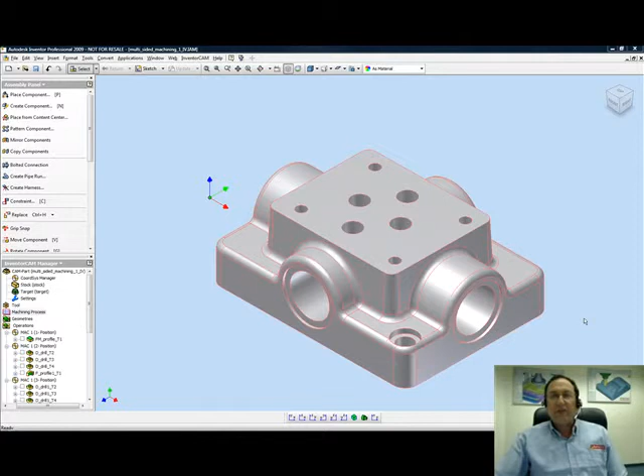I'm Sydney, your InventorCAM Professor, and in this session we'll show you how to machine this part using multi-sided machining.

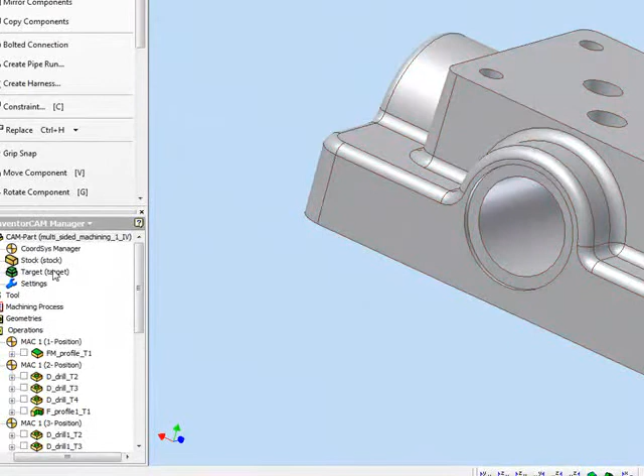If we take a look at this part, you'll see we have to machine it from the top, and we also have to drill out and machine this area over here, and the same thing on this side, and on this side as well. We should also note that the stock material is actually a cast part.

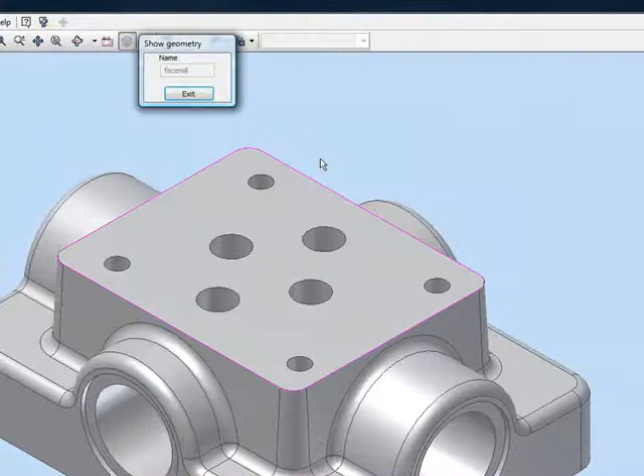I'll start my first operation by simply face milling the top. In my face mill operation, my geometry is just the boundary over here. The tool is a 16mm end mill, my upper level is 2 millimeters above the zero of the part, and my face depth is on the face itself. The technology used is hatch technology, going back and forth on the part.

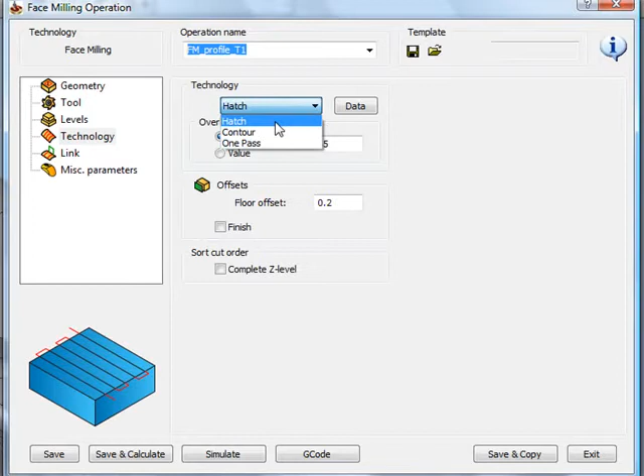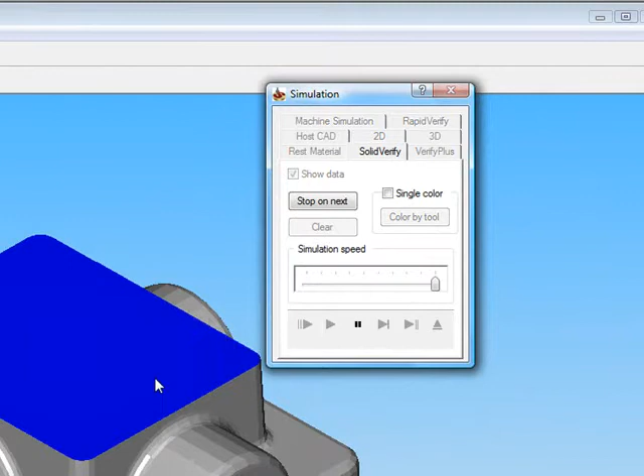Looking at our simulation, you'll note that it only works on this particular face. If I do a solid verify simulation, you'll see the tool goes down and mills every one of these faces back and forth, only on this face and nothing else. My stock material is a cast part, so only this top part needed to be machined.

In my next operation, I have to drill out one of the sides. I'm using my next home position, position 2, to drill out this side and mill this face. I've created, using MAC 1, a drilling operation as shown here, using that point over there. The tool is an 8mm tool at 90 degrees as a center drill.

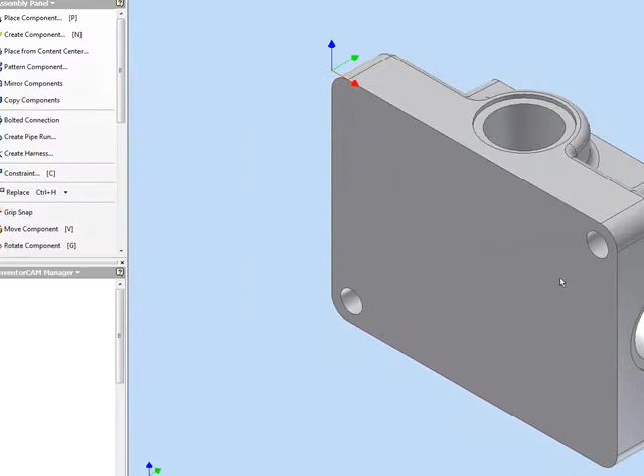My levels were upper level 0 and drill depth 0, going down to a 7.5mm diameter of the tool itself. If I simulate the part using solid verify, you'll note the tool goes down and gives a simple center drill spot onto that point.

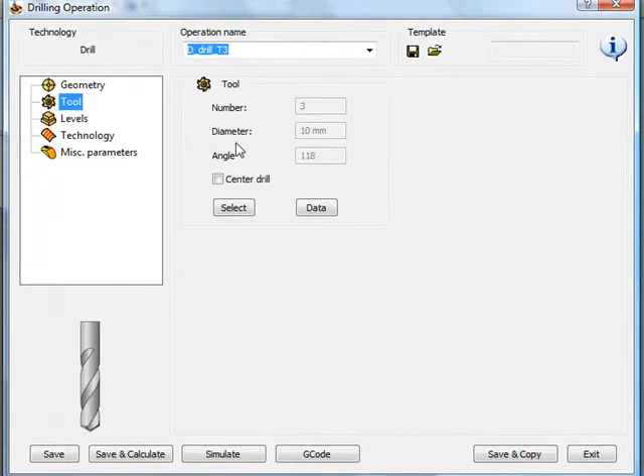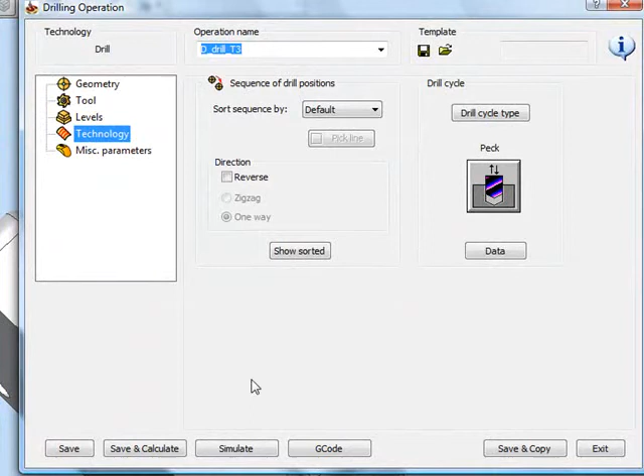Now we'll continue with our next operation, another drill operation, using the same geometry and position as before. This time the tool was a 10mm drill. My upper level again 0, drill depth going down with the cutter tip toward this area, and my technology was a simple pecking operation. Using SolidVerify simulation, you'll note the tool goes down and drills out what had to be drilled.

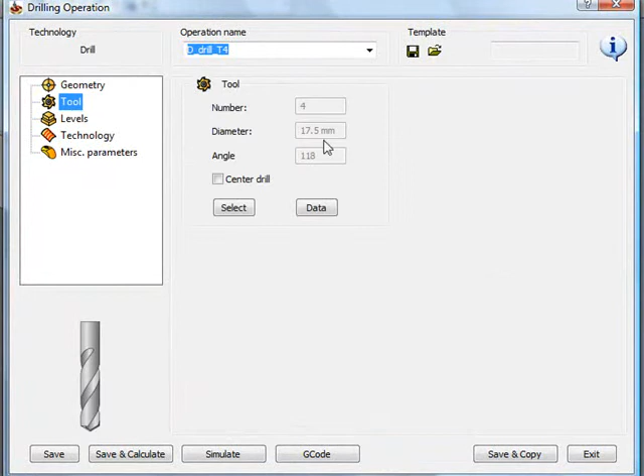In my next operation, I've created another drilling operation, again using the same MAC position. This time my tool was a 17.5mm tool, the diameter of the actual hole itself. My level is the same as before, and this completes the drilling operation for this part, as we can see in the simulation.

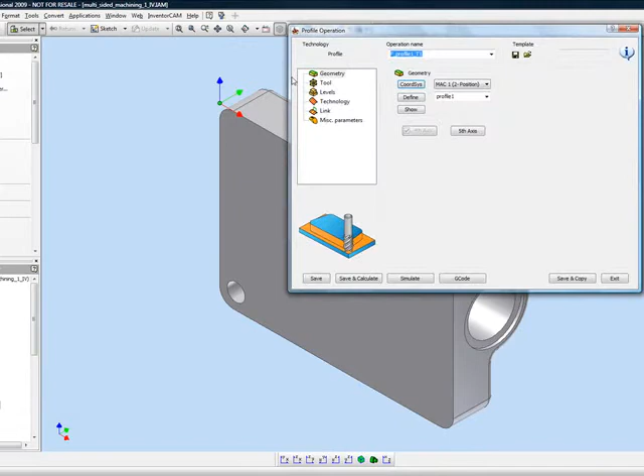My next operation was a profile operation. Opening it, again position 2, you'll note my profile was the actual circle over here. I used a 16mm end mill. My profile depth went down to that floor, and my technology was a simple finish technology with an approach of a 2mm arc and a matching lead out.

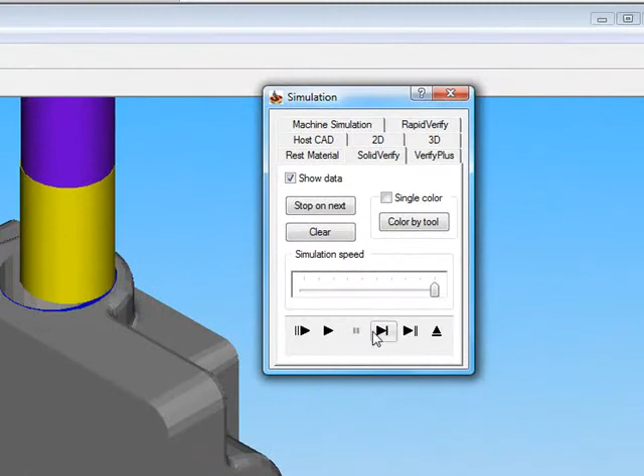Looking at the simulation, the tool goes down into the hole around the part, milling out the exact step as shown there.

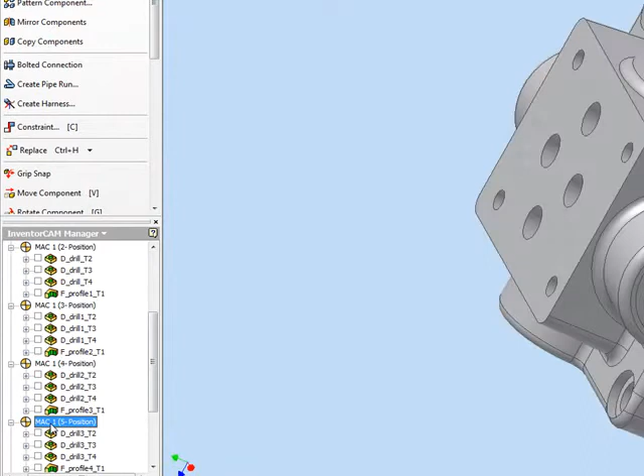Now in my next positions, position 3, and if I go further down, position 4, and position 5 - all of them have to do the exact same thing: drilling and milling out. And that's exactly what I've done. In position 3, I've done the exact same operations as before. The same thing in position 4, and the same thing in position 5. We have all the same operations.

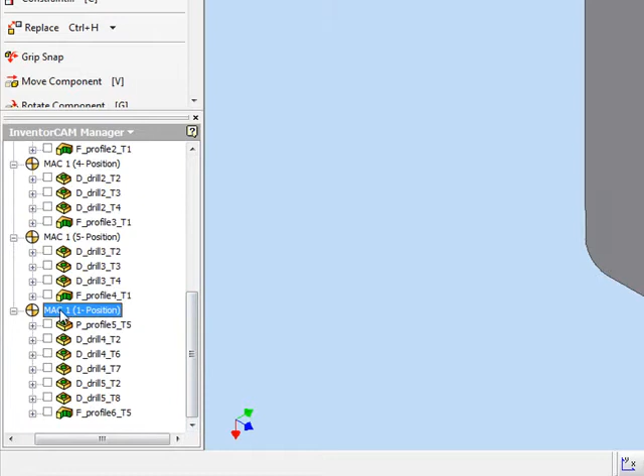Now, when I go back to position 1, we now have to finish drilling out these holes over here. So over here, again, I've started with this first particular operation, and I've actually started out first with a profile operation. In this operation, if I show you my geometry, I'm going into these holes itself.

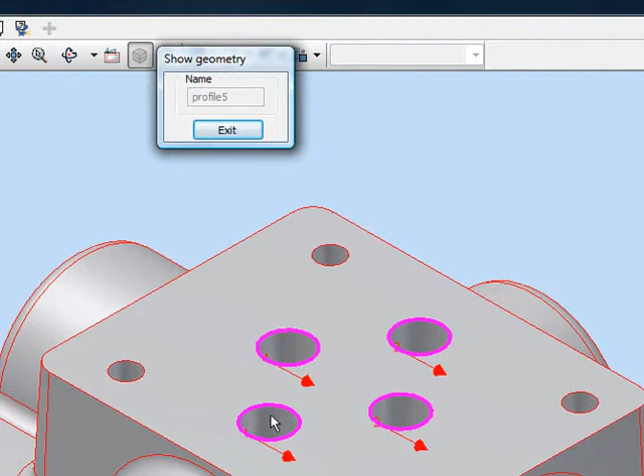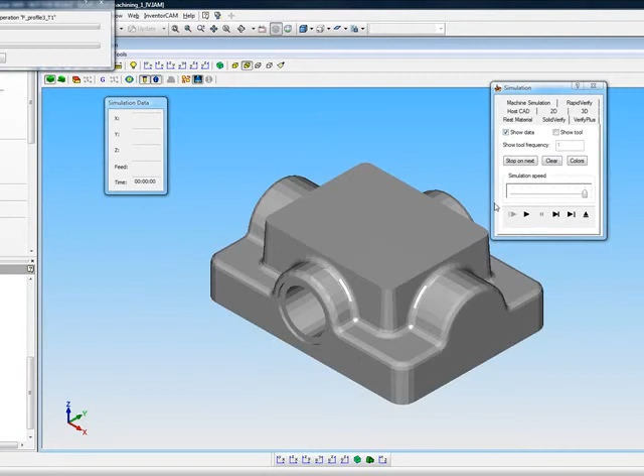As shown here, the tool I will be using is a 6mm tool, going down to a depth of 21 millimeters. My technology will be a simple contour option. If I go into my simulation and use solid verify, you'll note that the tool goes down into every single one of those holes and mills it out in a pocket fashion. That's just another way that we can actually do these holes.

The same thing was done with the rest of the holes around on the part itself, as shown here.

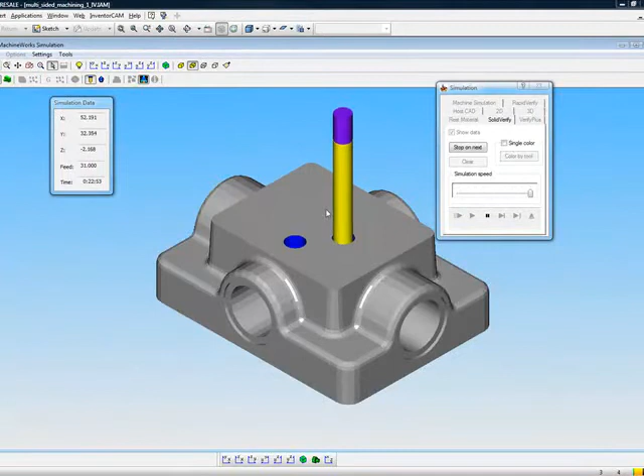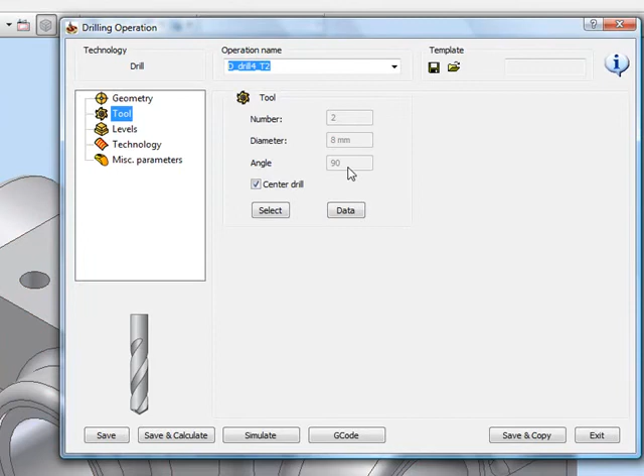In my next operation, I've created a drill for these holes around here, and I've used again the 8mm center drill. My upper level and drill depth was 0, having the diameter of the tool go down until it reaches 3mm in diameter, machining onto the part itself, depth of the tool itself.

If we again take a look at solid verify for the simulation, you'll see that the tool goes down only until it reaches that particular diameter of 3mm over there on the 0 level.

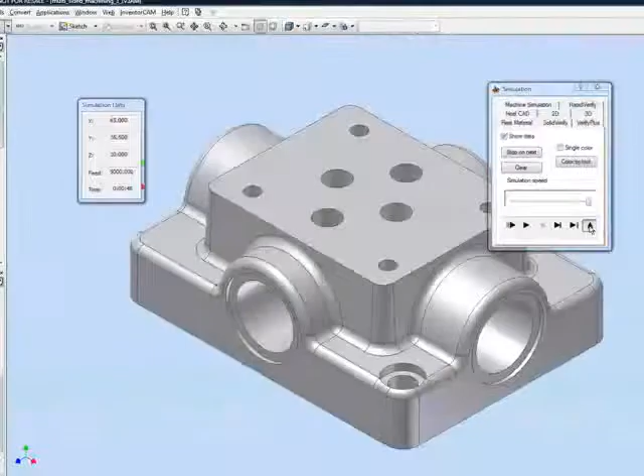Now, if we go into our next operation, we'll do the exact same geometry as shown here, and this time we'll be using a 4mm tool where the upper level is 0 and my drill depth is 13.5, going down to the cutter tip.

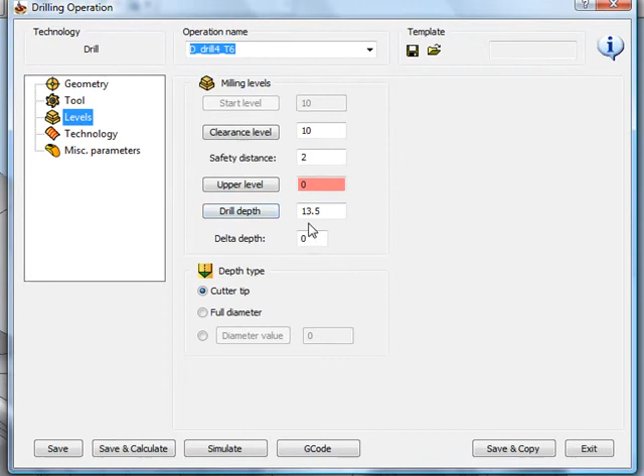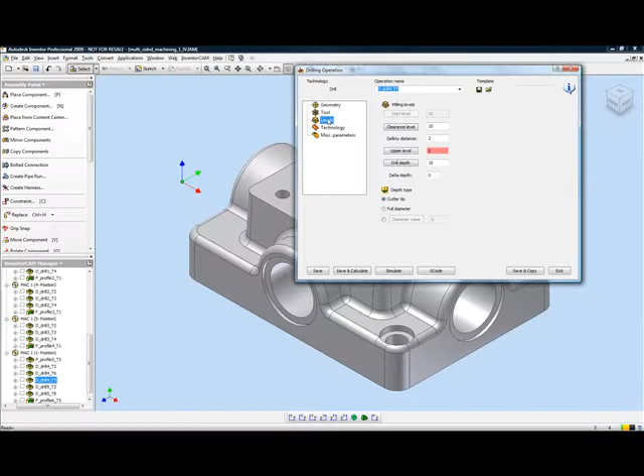My next operation continues on the exact same location. This time I will be using a tool that's 4.2mm with a flat bottom. My levels will be from upper level 0 to a depth of 10mm, and my technology will be regular drilling.

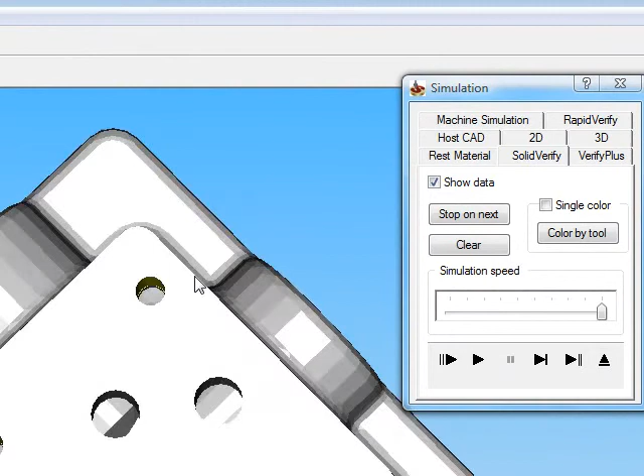If I were to look at my simulation again using SolidVerify, you'll note again that the tool will go down directly into the part, the same thing with every single one of those holes as shown here, and it'll give me a flat bottom up until that point that I'm drilling out.

Now, my next operation will be another drilling operation, but this time I'll be working on these holes over here - this hole there and the other hole on the other side over there.

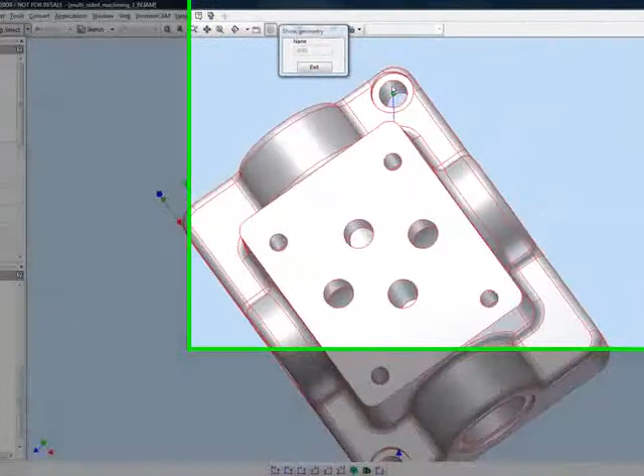The tool again will be my center drill. My upper level will be as shown over here, going down to a drill depth of 0 until it reaches a 5mm diameter of the tool.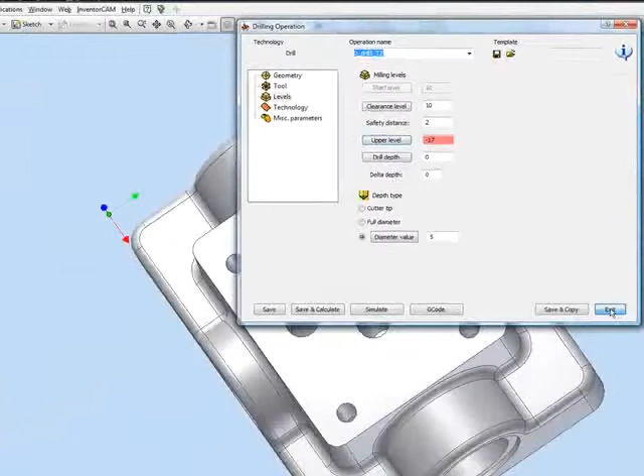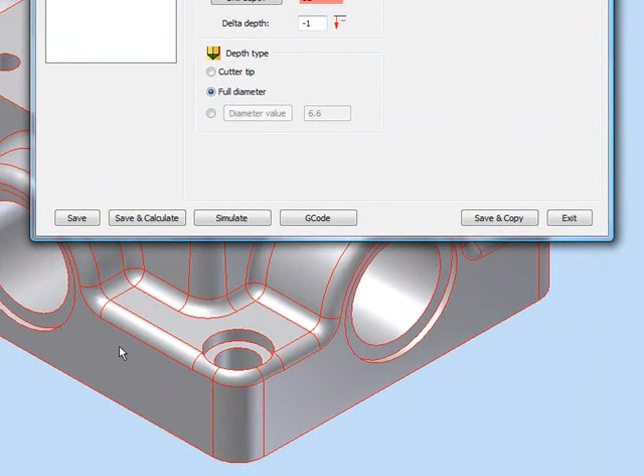In my next operation, again, I'll be going to that same area, into those same drill points. This time I'll be using a 6.6 millimeter drill. My upper level being 0 and my lower level being the very bottom of the part itself, having a delta depth of -1 so that the full diameter of the tool goes 1 millimeter past the bottom of the part itself.

Now, the last operation I've done here is simply these areas over here - I've actually milled out those steps.

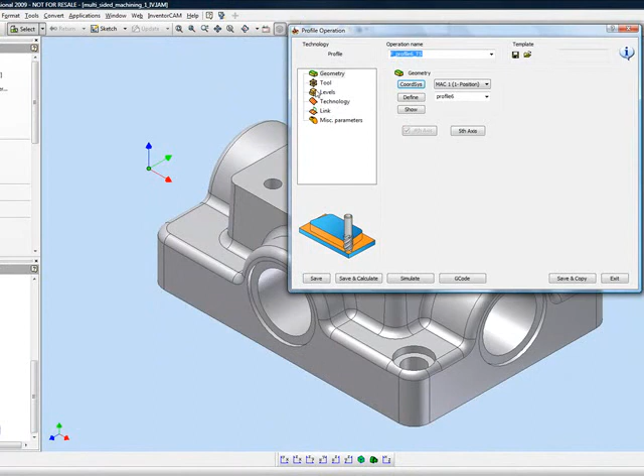As we can see, I've used a profile operation where my geometry is this area over there, and the same thing on the other side over there. My tool is a 6 millimeter end mill, and my levels, my upper level and profile depth, go up until that step itself.

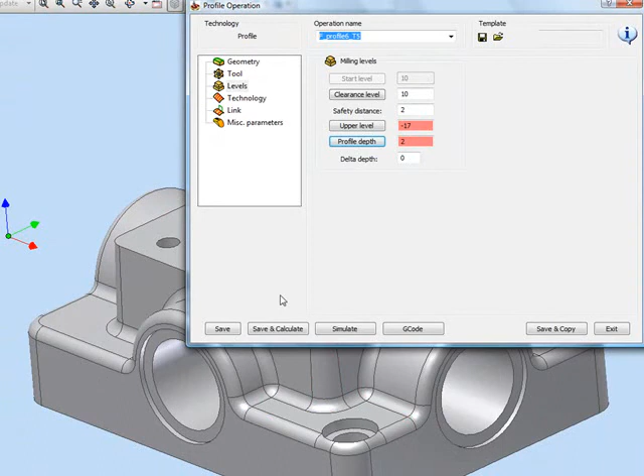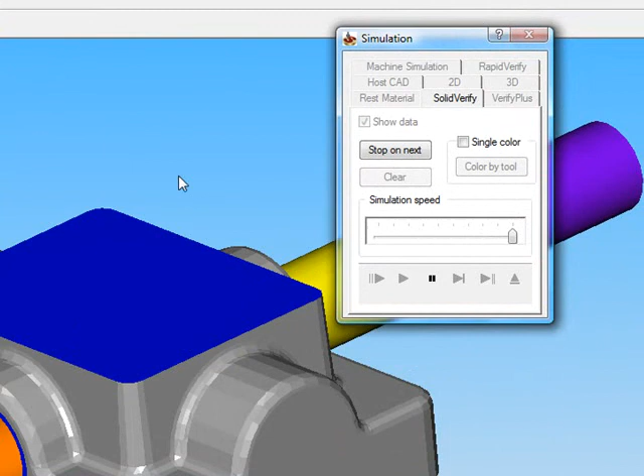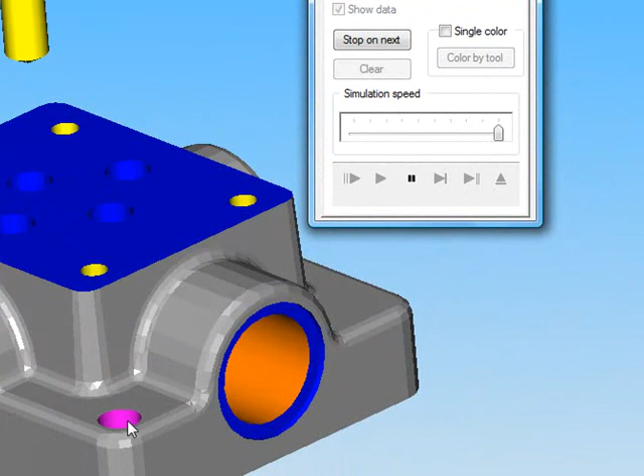Now, if I do simulation this time on the entire part, not just one operation, using SolidVerify, you'll see that the entire part is milled out from the very top, as shown here, to every single side, to this side, back to the top, completing every single one of those holes, then drilling out the holes in the corners, as we'll shortly see as it gets to the next drilling operation, and also the same thing at the corners of the part itself.

Now we've completed machining this entire part.